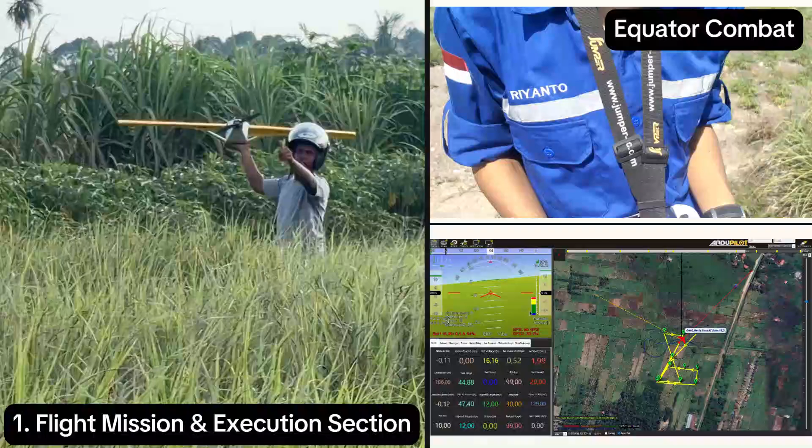Hello, I am Ahmad Saifuddin, captain of the Equator Combat Team. To manage efficiently, our team is organized into several specialized divisions. This structure allows every member to focus on their area of expertise, improve coordination, and reduce development time. Each division has clearly defined responsibilities and follows its own work schedule while maintaining close communication with the other divisions.

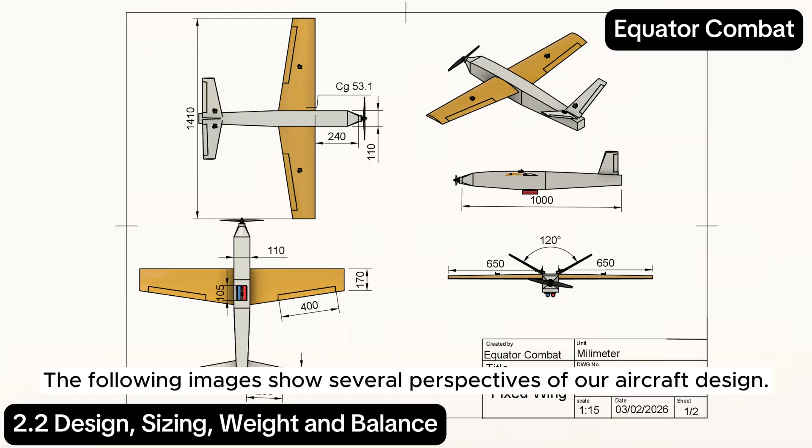The following image shows several perspectives of our aircraft design. The fuselage is 1000 mm long. Each wing measures 650 mm, giving the aircraft a total wingspan of 1410 mm. The tail uses a 120 degrees V-tail configuration to provide both pitch and yaw control.

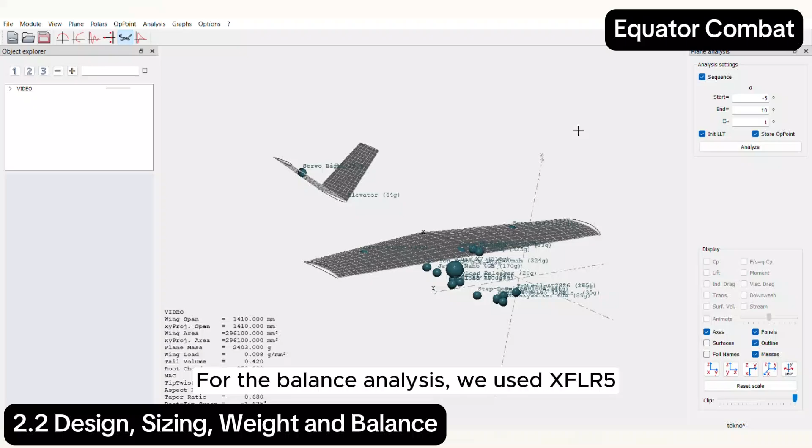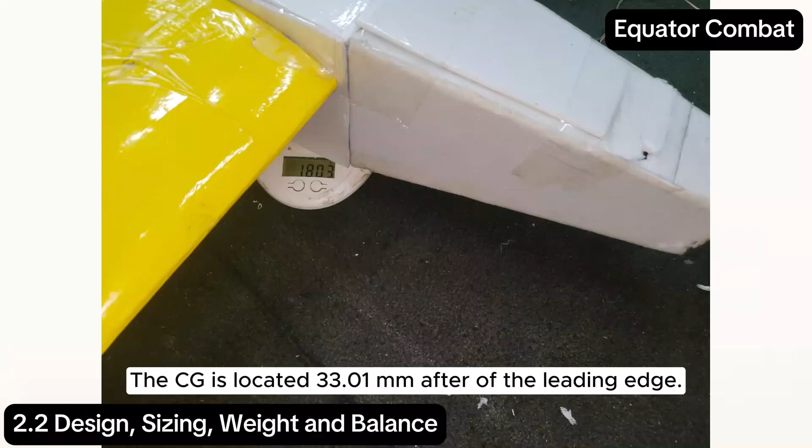For the balance analysis, we use XFLR5. This analysis ensures proper weight distribution, aircraft stability, and controllability during flight. Total aircraft weight is 2,403 grams. The center of gravity is located 33.01 mm aft of the leading edge.

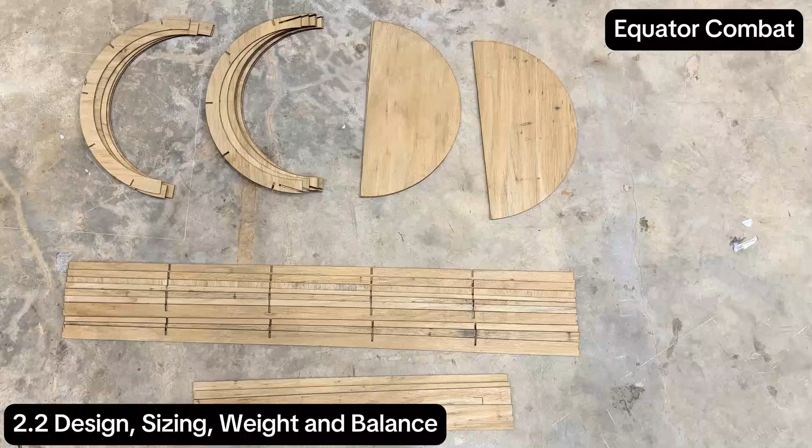The storage box has a diameter of 37 cm and a length of 105 cm. It is constructed from plywood, providing a lightweight yet durable structure that protects the aircraft during transportation. The storage box is also designed to be light enough to be carried comfortably by a single person, while ensuring adequate protection against handling and travel impact.

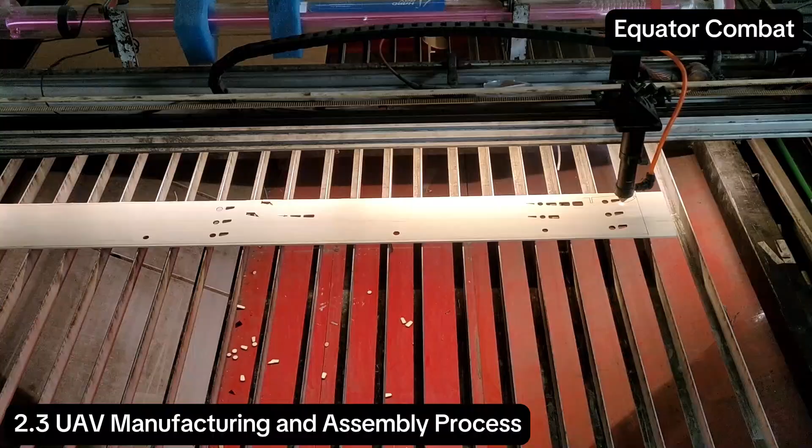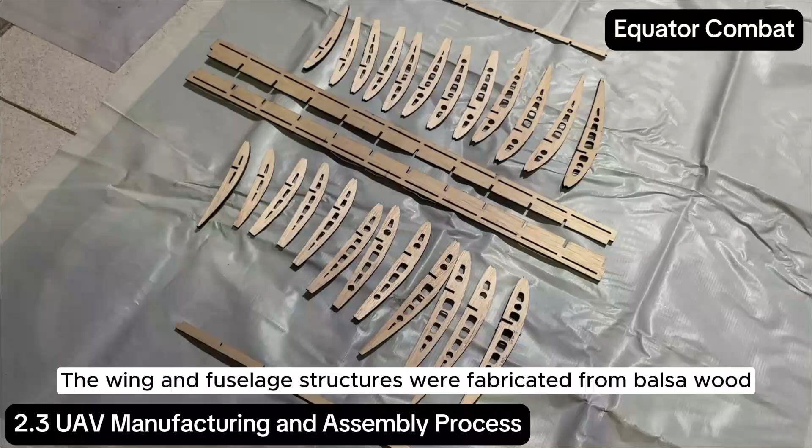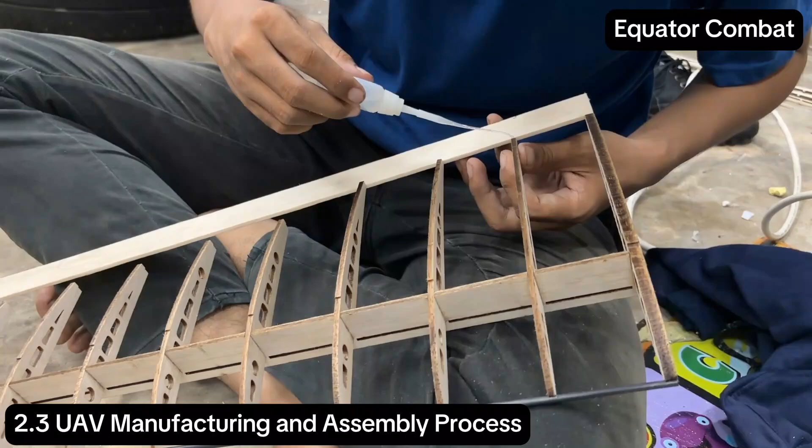The wing and fuselage structure were fabricated from balsa wood using a CNC cutting machine to achieve high dimensional accuracy and consistent component quality. After fabrication, the structural frames of the wing and fuselage were assembled and bound using adhesive. Meanwhile, the wing structure was covered with MonoKote heat-shrink film.

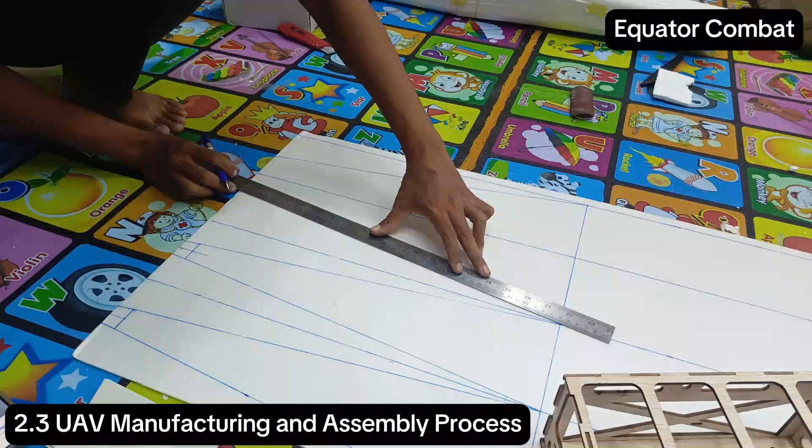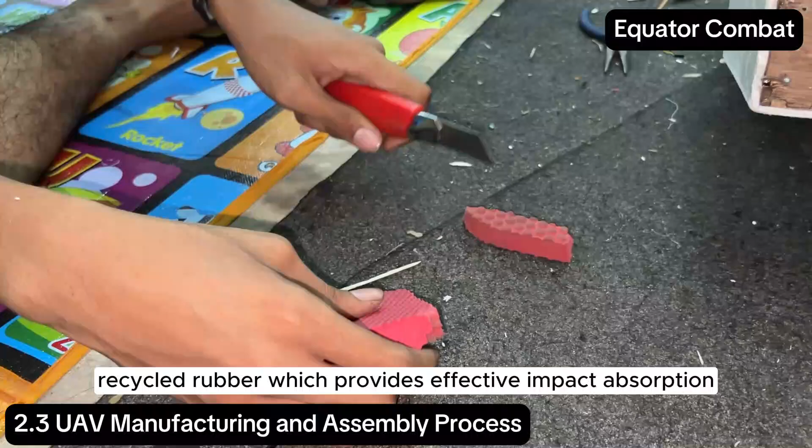The fuselage frame was then covered with 3 mm polyfoam, providing a smooth aerodynamic surface while maintaining low weight. The V-tail is reinforced with a 2 mm carbon fiber spar, increasing its structural stiffness and strength. The landing skid was fabricated from recycled rubber, which provides effective impact absorption during landing, while remaining lightweight and cost-efficient.

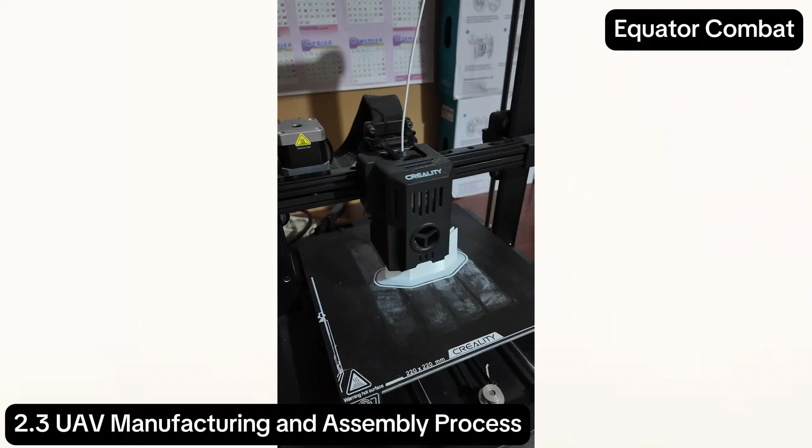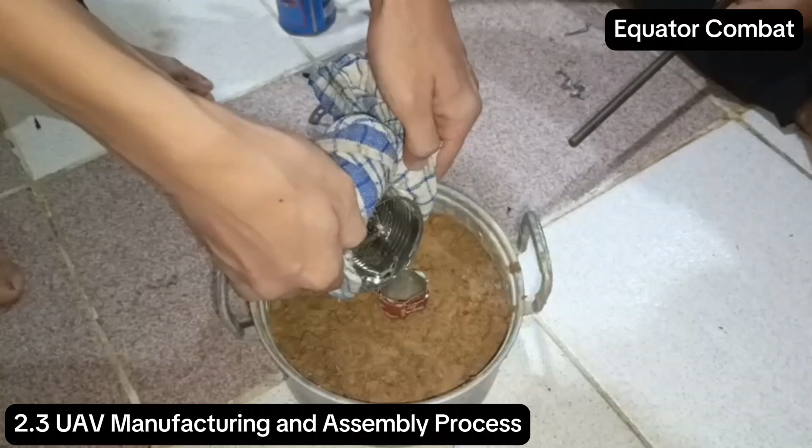The V-tail bracket, servo bracket, and camera bracket were manufactured using 3D printing with polylactic acid material, enabling precise fabrication and easy replacement when necessary. The payload is made of lead and has a length of 4 cm and a diameter of 2.2 cm.

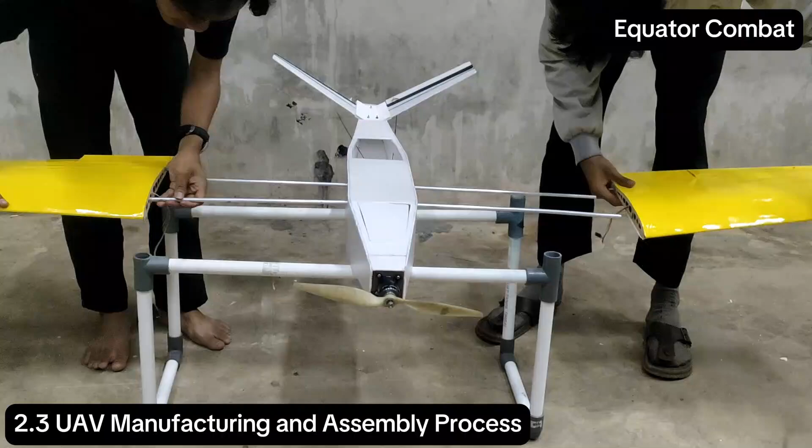The aircraft is equipped with two aluminum spar joiners with diameters of 9 mm and 8 mm to enhance the structural strength of the airframe. In addition, the spar joiners provide a modular assembly system, allowing the wings to be easily detached and reassembled for transportation.

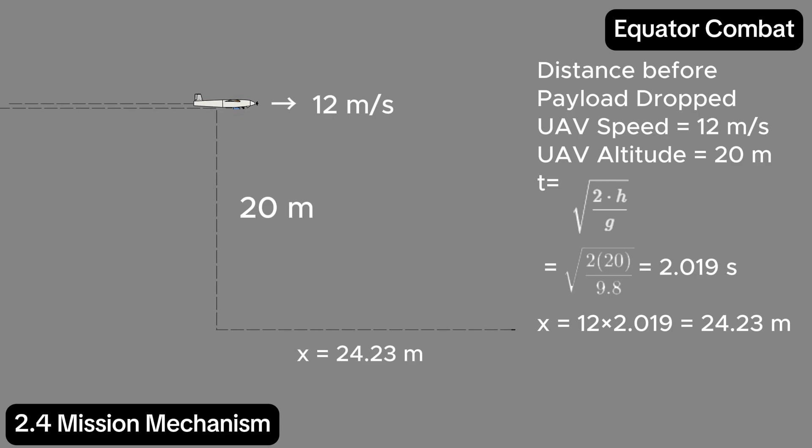During flight, the NVIDIA Jetson Nano continuously receives the aircraft altitude and airspeed data from the flight controller. These flight parameters are used to calculate the optimal release distance before payload deployment. The camera angle is updated continuously in real time according to the aircraft's current altitude and airspeed. When the calculated camera angle is achieved and the detected target is in line with the center of the camera image, the system automatically releases the payload.

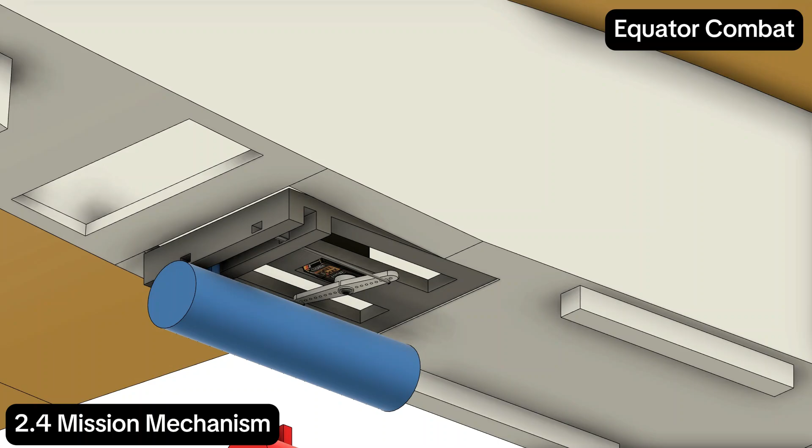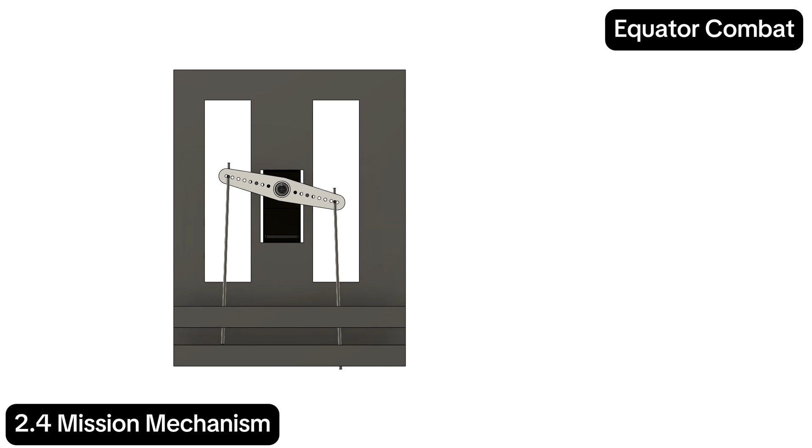The payload release mechanism consists of one servo motor and two release wires. Each payload is attached to a dedicated wire connected to the servo arm. In its default position, the servo is set to 90 degrees, securely holding both payloads. When the onboard vision system detects a blue square target, the servo rotates to 0 degrees, releasing the red payload onto the target area. After the payload is released, the servo automatically returns to its neutral position at 90 degrees.

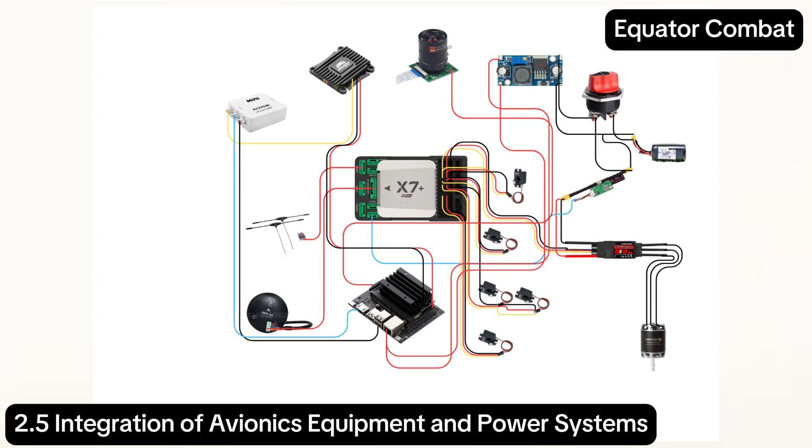The UAV is equipped with a CUAV X7 Plus flight controller, which provides reliable flight control, sensor integration, and autonomous mission execution. Ground control and mission planning are performed using Mission Planner, enabling flight configuration, waypoint management, telemetry monitoring, and mission execution.

The propulsion system consists of an AT2826 motor controlled by a Skywalker 60 ampere ESC, powered by a 4S 4000 mAh Li-ion battery. Flight control surfaces and the payload release mechanism are actuated using EMAX ES3352 servos.

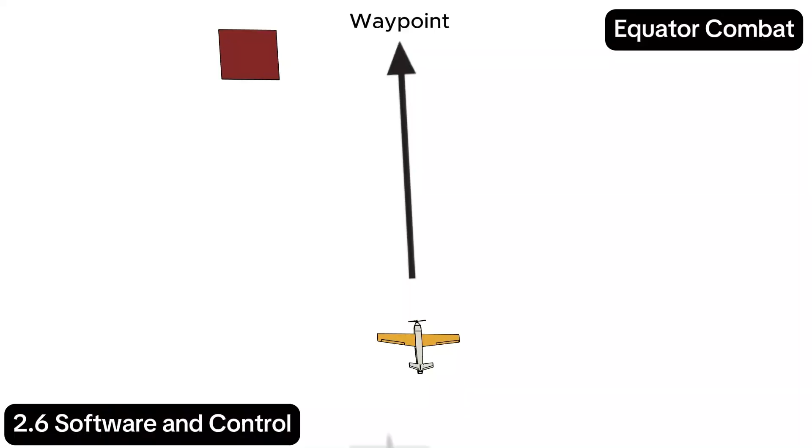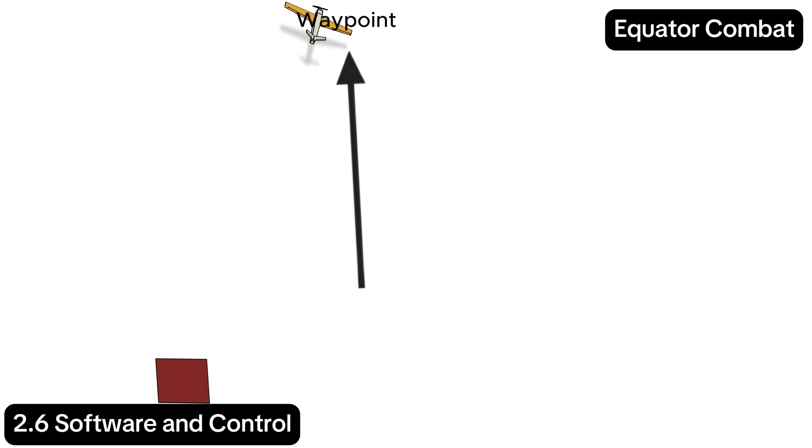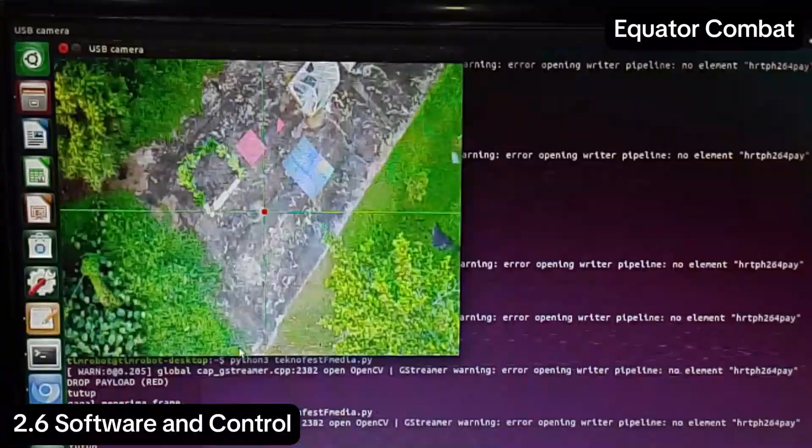The target detection algorithm identifies objects based on two criteria: color and geometric shape. First, the captured image is converted to grayscale to simplify image processing and enable contour extraction. The detected contours are then analyzed to determine the number of vertices, allowing the system to recognize the object with four corners.

The integration is that the camera records video, then the NVIDIA Jetson Nano processes the image, and then the Jetson gives a command to the flight controller to move the servo when the target is in the center point of the camera. Code to read angles and read colors. Code to calculate the target position relative to the camera center and drop logic.

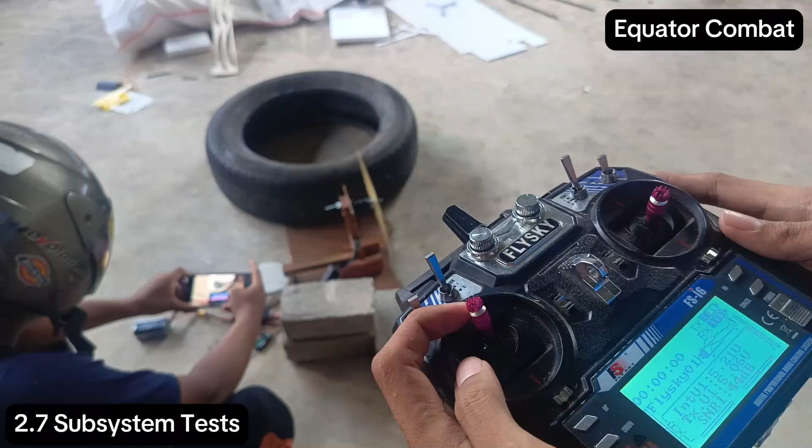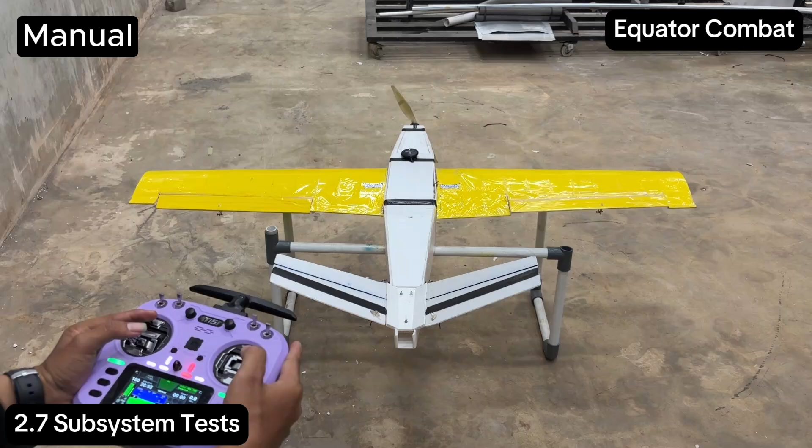A comprehensive manual control system test was also performed to verify the correct operation of the flight control surfaces. The aircraft was manually commanded to roll right, roll left, pitch up, pitch down, yaw right, and yaw left to confirm that the ailerons, elevator, and rudder respond correctly to the pilot input.

Stabilize mode was tested by manually disturbing the aircraft in the roll and pitch axes. The corresponding control surfaces were observed to ensure they generate corrective deflection opposite to the applied disturbance.

The structural integrity of the airframe was evaluated through drop tests conducted from heights of 2 meters and 6 meters. After each test, the aircraft was inspected for structural damage. No cracks or permanent deformation were observed, demonstrating that the airframe possesses sufficient impact resistance to withstand accidental landing impacts and handling loads.

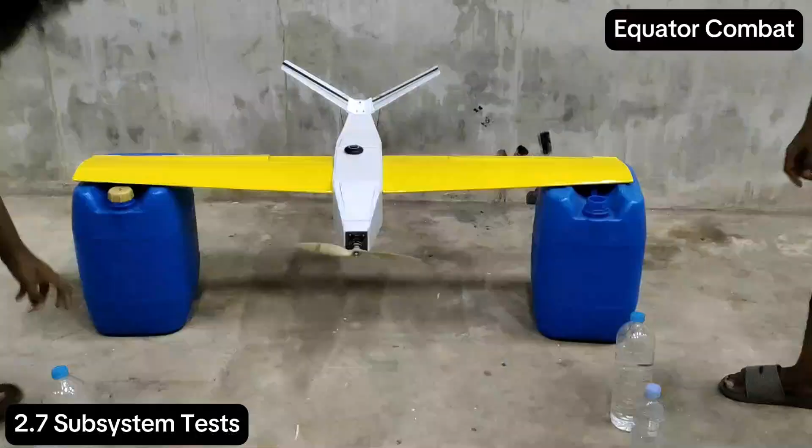The wing structural strength was evaluated through a static load test by applying a 3 kg load to the wing. The test was conducted to verify that the wing structure and the spar system were capable of withstanding the expected aerodynamic loads during flight.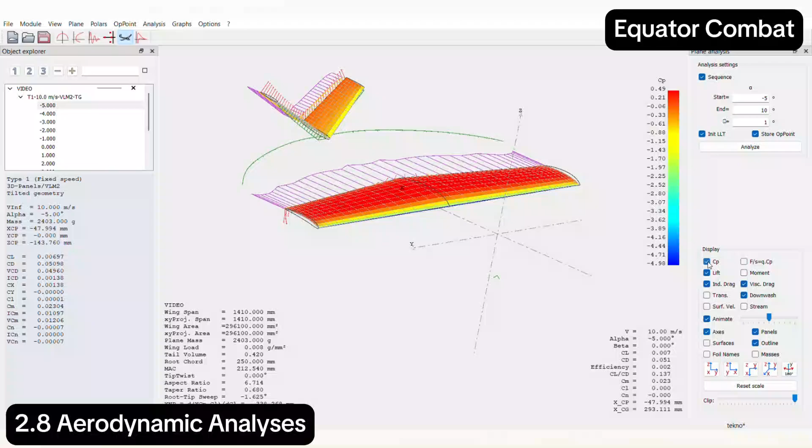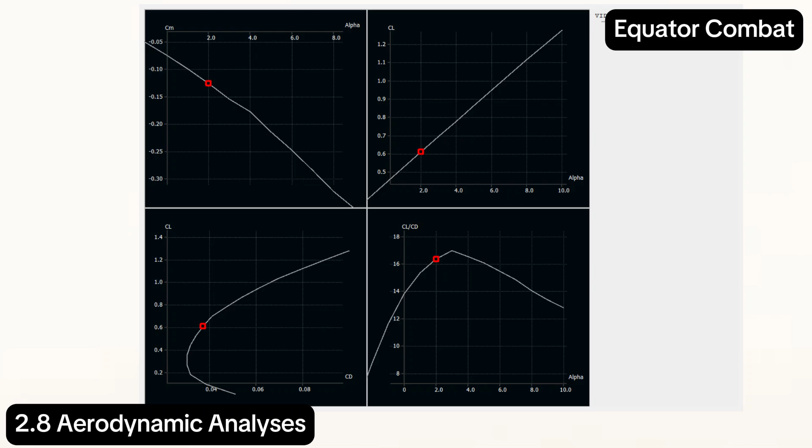The XFLR5 simulation results show good aerodynamic characteristics. Lift increased as the angle of attack increased. The pitching moment shows longitudinal stability, and the maximum CL/CD value of around 16 to 17 indicates the most efficient flying condition. The total weight with the payload is 2,403 grams. We also obtained a normal cruise speed of 12 meters per second.

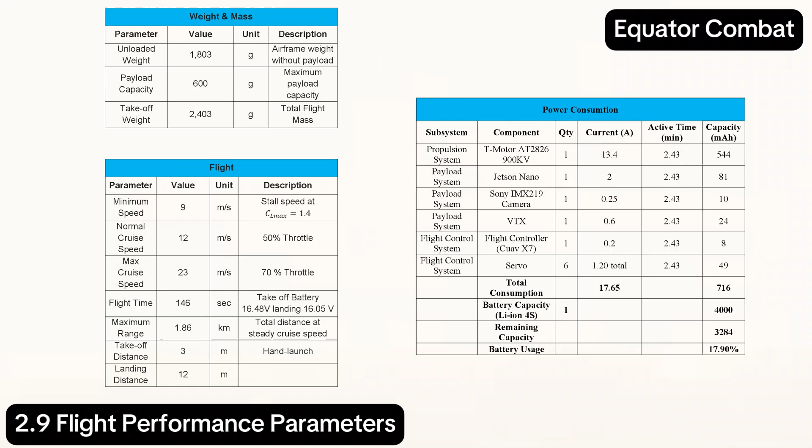From the flight test, the average flight was 2.43 minutes, with a total power consumption of 17.90%. For flight safety, the UAV was configured with a return to launch, or RTL, failsafe. In the event of a loss of radio communication or other failsafe condition, the flight controller automatically switches to RTL mode.

The V-tail and fuselage are secured using removable bolts. An emergency switch is installed to immediately disconnect the electrical power supply to all onboard components. These features provide a quick and reliable method of shutting down the aircraft in less than 2 seconds. A motor lock function is implemented to prevent the propulsion system from starting unintentionally.

There are some changes. For the flight controller, we use the CUAV X7 because it has physical durability and sensor quality, processing capabilities, faster signals, and more adequate input-output for additional payload needs. And then the camera, we switched to the Sony IMX219 because it supports interchangeable lenses for aerial photography and is more compatible with the CSI Jetson Nano interface.